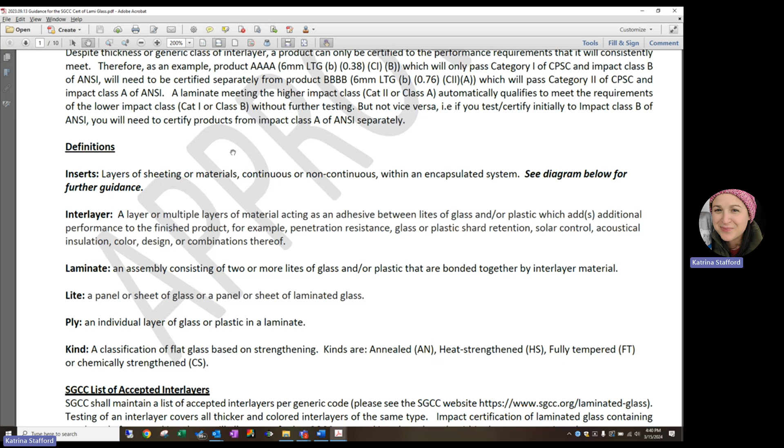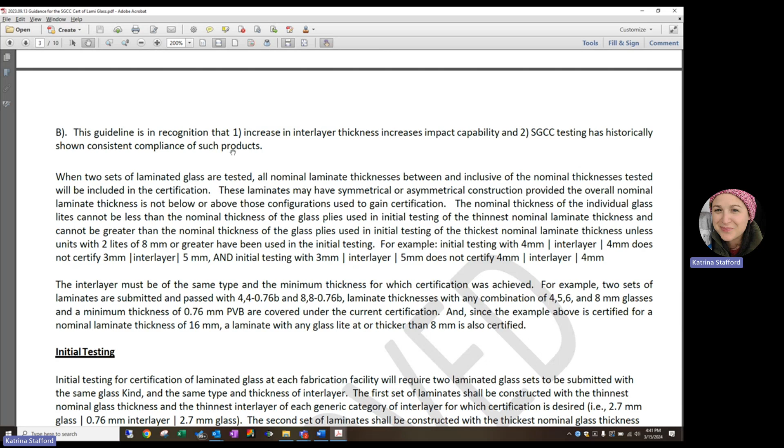It contains all of SGCC's laminated guidelines, will take you through the summary of the changes, how the summary nomenclature was established. It's going to go into detail about specific specialty product requirements, including inserts and coatings. It's also going to show you the new laminated labeling changes that are going to be put into effect as well.

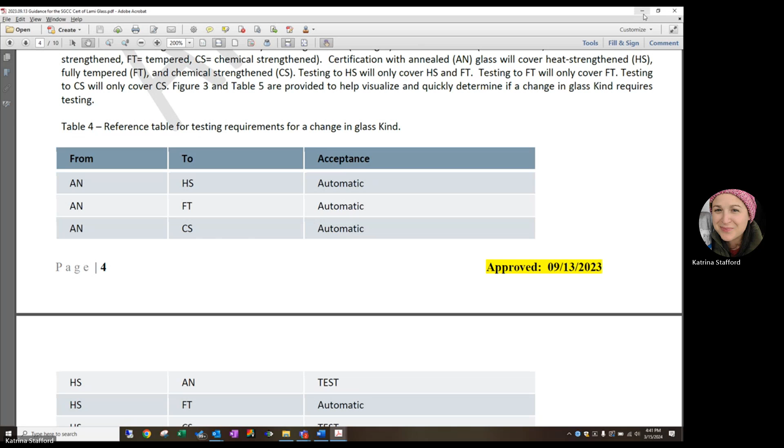This email contains a memo. Within this memo, it lists out the LAMI guidelines, requirements, timetable, along with a summary of the changes, what needs to be done and when, and a brief summary here below.

A few notable dates include April of 2024, when SGCC's L24 invoices will be issued. These will include your new numbers, along with July 1st of 2024, when the transfer of your old certification numbers to your new numbers will be done and activated. No changes will occur to your certification until this date.

A brief overview of the summary of changes: there will now only be one acronym for laminated glass, and this will certify all laminated glass. The new acronym will be Laminated Safety Glass, and there will no longer be laminated specialty products.

The removal of standard and heavy classification and categories. These categories were defined as: if you certified anything thinner than 8mm, you were in the standard category; if you certified anything 8mm or greater, you were in the heavy category. These will be going away.

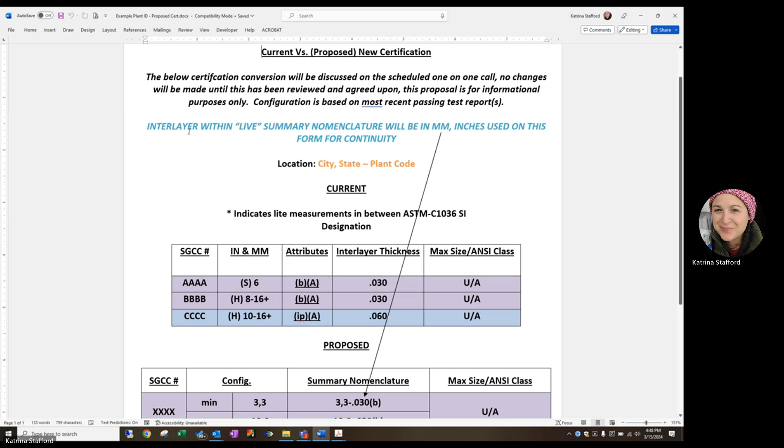So let's compare your current certification to what's being proposed. These changes will hopefully result in a condensed SGCC number, since SGCC has moved away from the standard and heavy categories. So you can see here, we've started with these 3 SGCC products, and we've been able to condense these 3 down to 2.

The colors were used to help correlate between the 2 charts. So starting with this product here, AAAA, it is a standard product that has a nominal thickness of 6 millimeters, using an 030 PVB interlayer and a base glass kind of annealed glass.

We have another product, BBBB, that is within the heavy category, a nominal thickness range of 8 mm to 16 plus, using an 030 interlayer, PVB, and a base glass kind of annealed glass.

We were able to condense these 2 products down to 1. This new proposed number is showing the thinnest or minimum configuration at the top and the thickest or maximum configuration at the bottom. So these are the thinnest and thickest configuration that you are certified to.

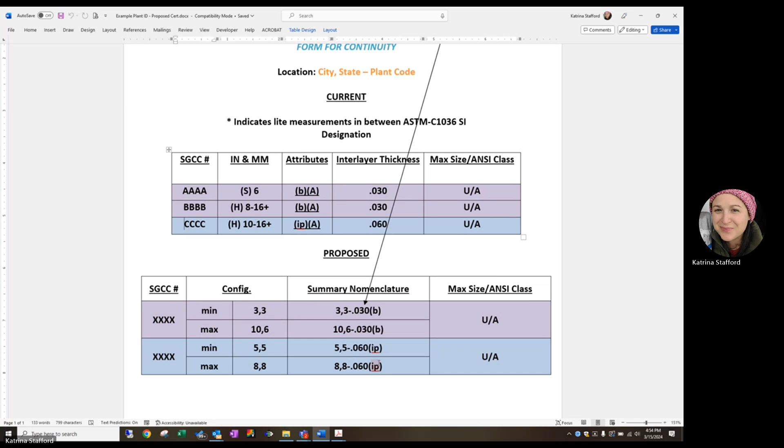Included in the email memo, there contains a detailed outline of these SGCC changes. This can be an overwhelming document, greater than 20 pages long, but we will try to go through this briefly and review it. We do request that you review this in detail prior to having a call with SGCC, or if you have more questions.

It does go into, again, what changes the licensee is going to be seeing and looking at between initial testing, the removal of the two different types of acronyms to only one, LSG.

This presentation also goes into explaining your initial and ongoing testing requirements. It shows you how SGCC used to certify laminated glass along with the range. If you were certified for an 8, a 10, a 12, and a 16 under one number, you had to initially submit 8, 10, 12, and 16 millimeters to get that range.

Now, you will only need to send your thinnest configuration, the minimum, and your thickest configuration, the maximum, and you will be certified for everything in between.

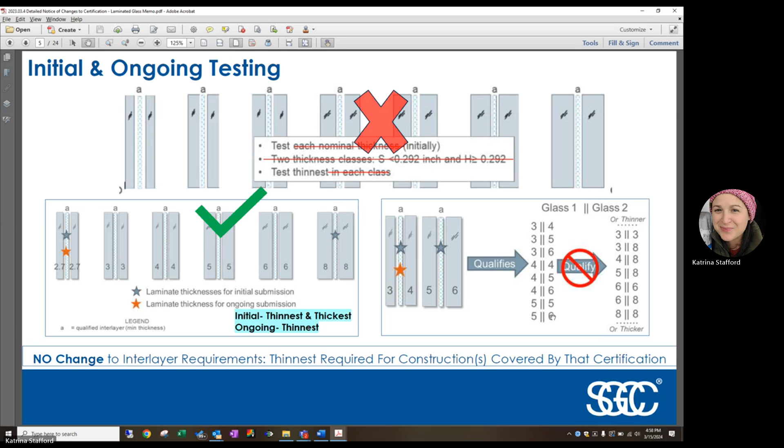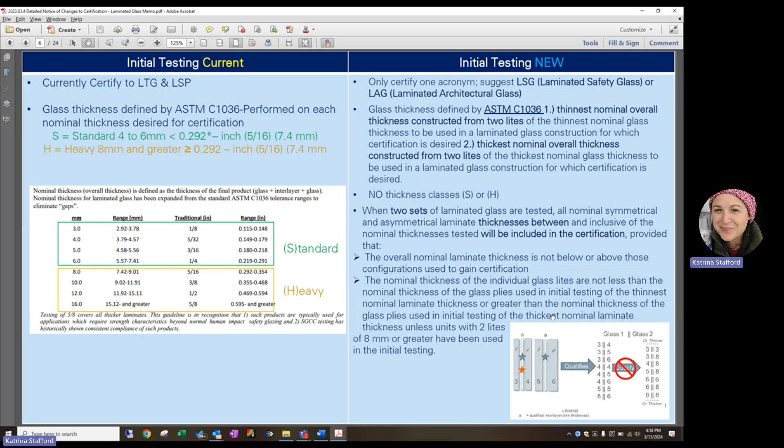The following pages here within this document break down in more words and reiterate more of the same items previously discussed, just in more detail.

This is a list of the guidelines that are currently within the SGCC Laminated program that will not be changing. These will be remaining the same.

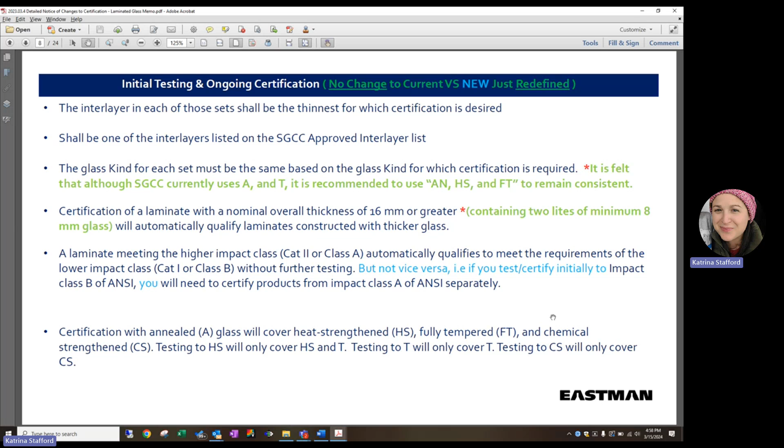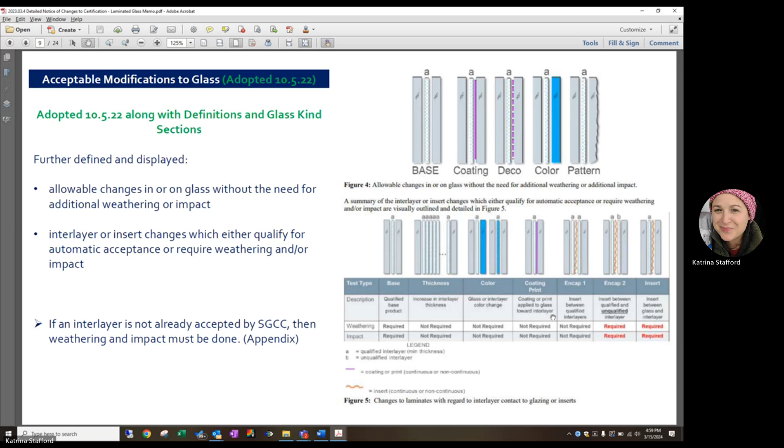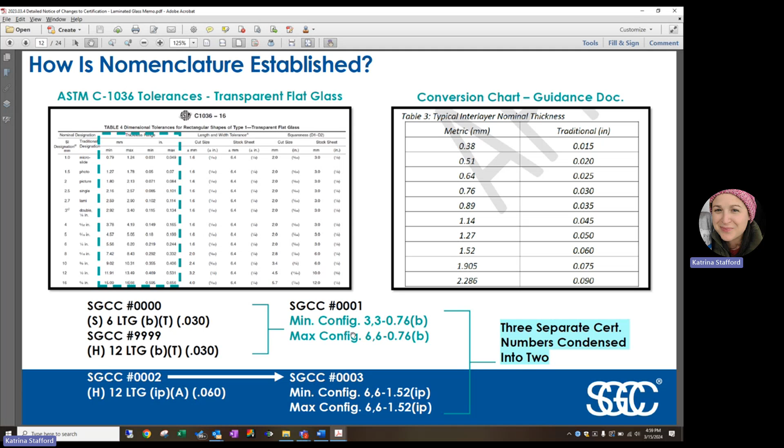On this slide, we are displaying how the summary nomenclature was established using the ASTM C1036 tolerance table for transparent flat glass and converting that from inches to millimeters, giving us the ability to display all of our new nomenclature in metric form.

Here's an example of how SGCC staff are using your existing certified test reports to obtain your new nomenclature breakdown. Again, the SGCC board approved using existing test reports that contain the required material, so we will do our best to limit the amount of additional testing needed on your part. But you may be required to send in additional testing if we're unable to gather the necessary information. If we have a report available that contains all the required info needed, we promise we will utilize it.

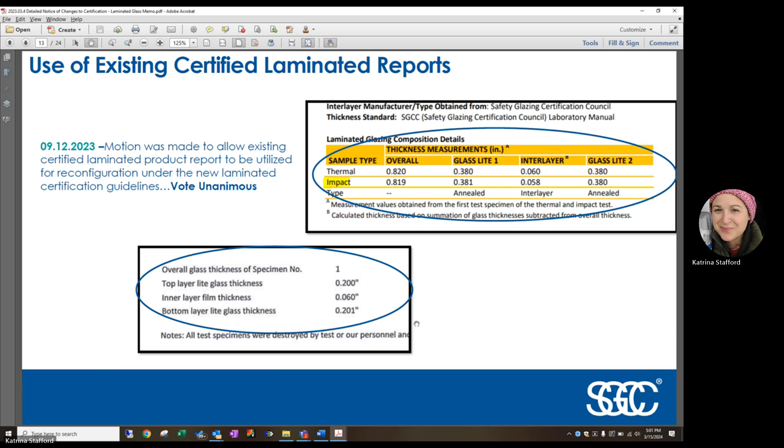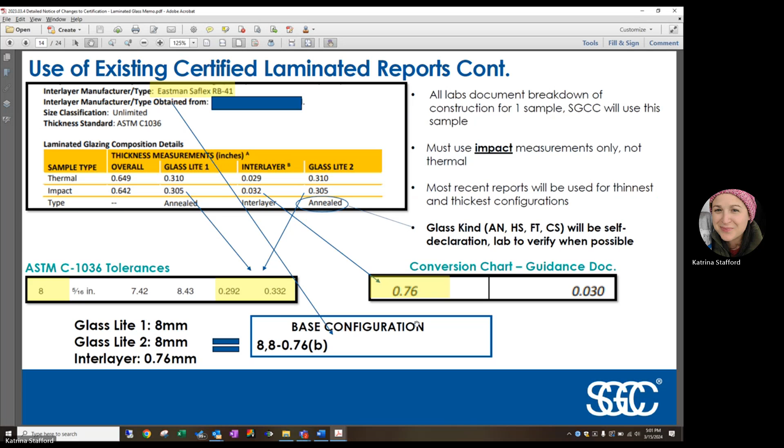Here's a more detailed breakdown of how we use these test reports to determine that summary nomenclature. This is an example of a current laminated specialty product that we use to break down this configuration.

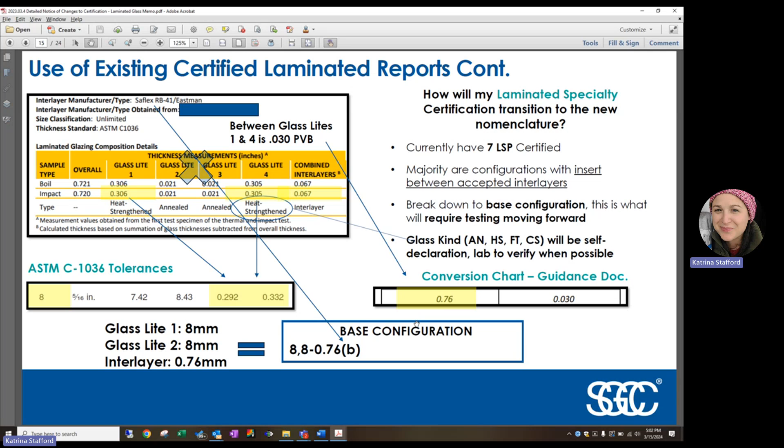Many of our laminated specialty products now contain inserts that are encapsulated between two approved interlayers and therefore are covered under the base construction and do not need to be tested and certified separately with this new laminated guideline change. SGCC's main focus is to test the adhesion of the interlayer to glass, so anything encapsulated between two already approved interlayers is covered by the base construction.

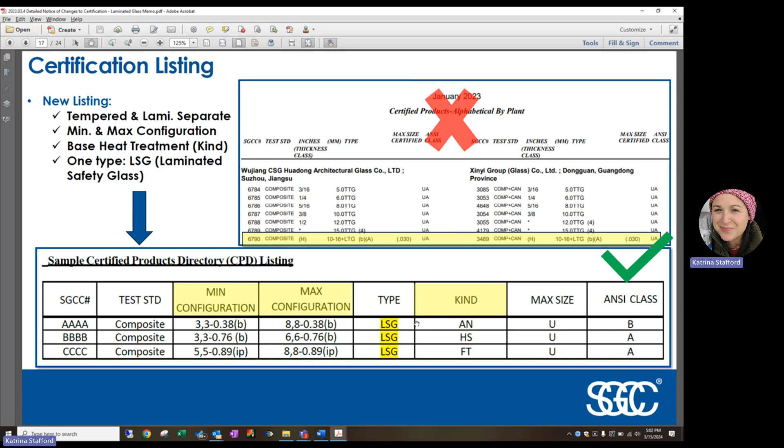Here we're providing an overview of the certified laminated listings, how your product will appear in the CPD, and how your plant certificate will be presented. Laminated and tempered glass will be separated on your new certificate.

The CPSC documents, or SGCC's Record of Compliance Testing documents, will include the new min and max nomenclature within the product identification.

The next few pages include a few Q&As that we have received from certified laminated fabricators. And as we continue with these efforts, SGCC will maintain an up-to-date list and provide it on our SGCC website.

This slide provides a bullet item summary page of everything that has been discussed in this document, along with the implementation schedule. So again, you will see your new numbers on your April billing statement. They will not take effect or be activated until July 1st of 2024.

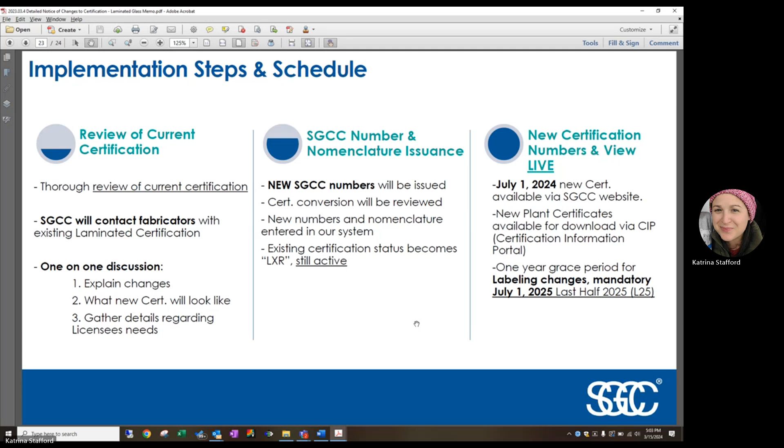So if there are any changes that need to be made in the meantime, those changes can be reviewed and discussed and adjusted by SGCC.